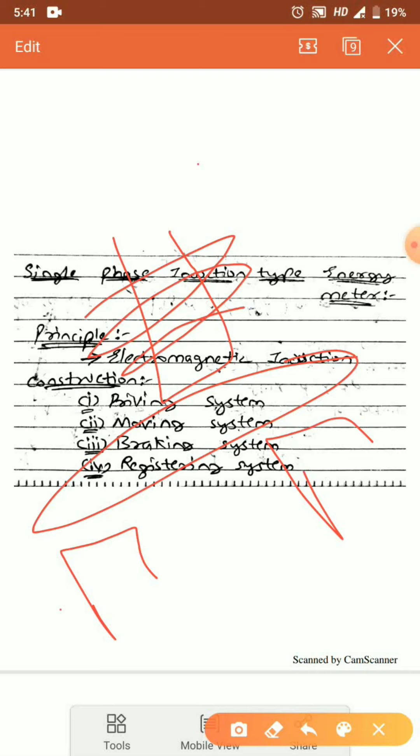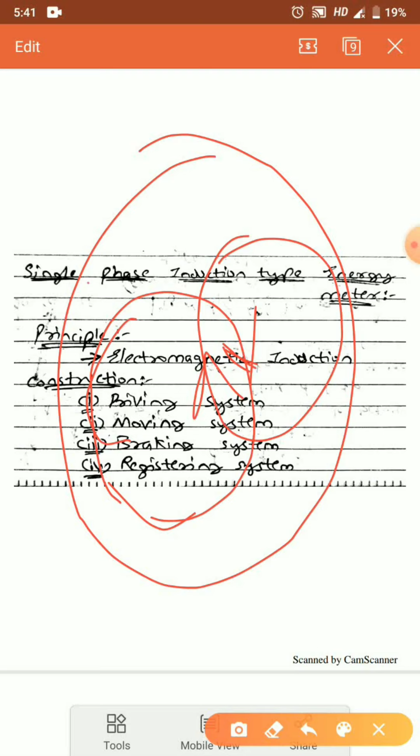Now let us move on to the construction part. The energy meter will have four different systems: a driving system, a moving system, a braking system, and a registering system. Let us go into detail about all these systems.

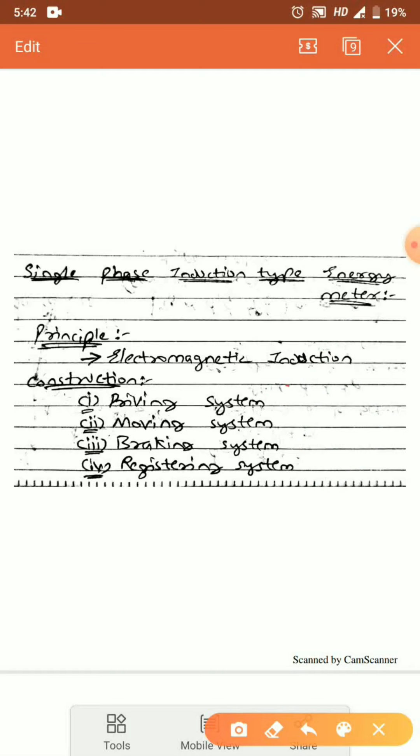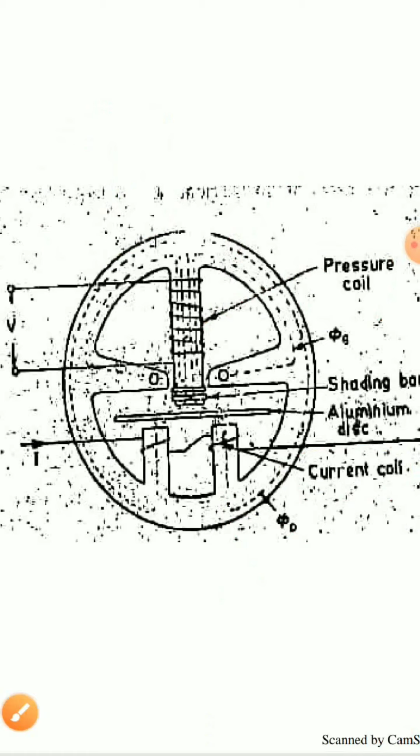The first system is the driving system. In the driving system there are two electromagnets, the core, which we'll call the shunt electromagnet and the series electromagnet. The shunt electromagnet corresponds to the pressure coil, and the series electromagnet corresponds to the current coil. The core of these electromagnets is made of silicon steel lamination.

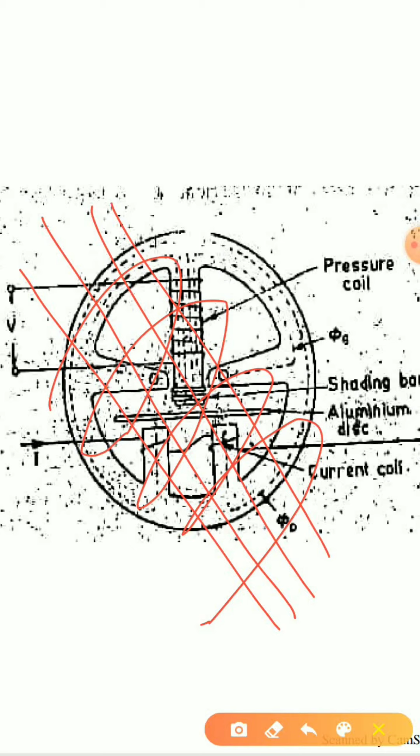Previously we've seen instruments where the winding was air cored, but here the winding is not air cored. In between the winding there is a silicon steel core, that is the electromagnets have a core of silicon steel laminations, as we see in a transformer. One coil of the electromagnet is excited by the load current, whatever current is flowing through the load passes completely through the series electromagnet. The second coil carries a current which is proportional to the supply voltage.

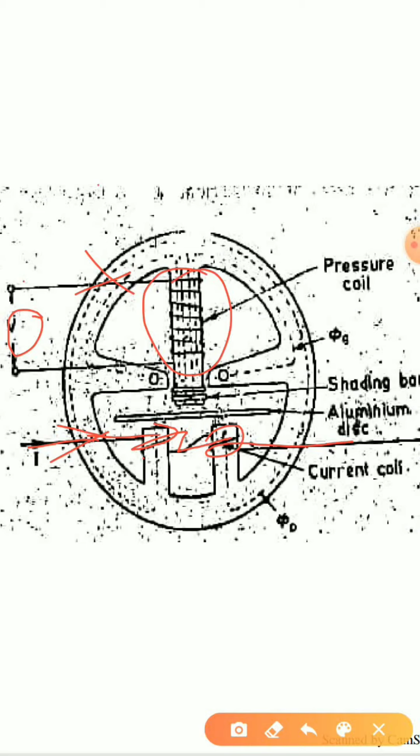If this is my supply voltage, it will measure the voltage across the supply, and whatever current is flowing in this pressure coil or shunt electromagnet will be directly proportional to the value of the supply voltage. These two magnets are called the shunt electromagnet and the series electromagnet. Why series electromagnet? Because it is carrying a current I in series. Why shunt? Because it is measuring the voltage, and whatever current appears across this shunt electromagnet is directly proportional to the voltage value.

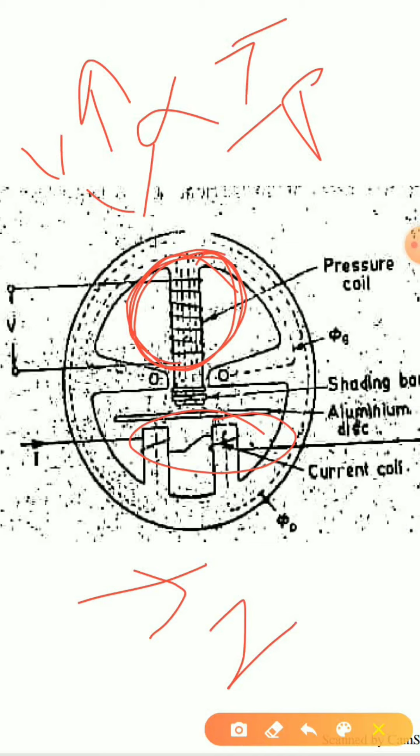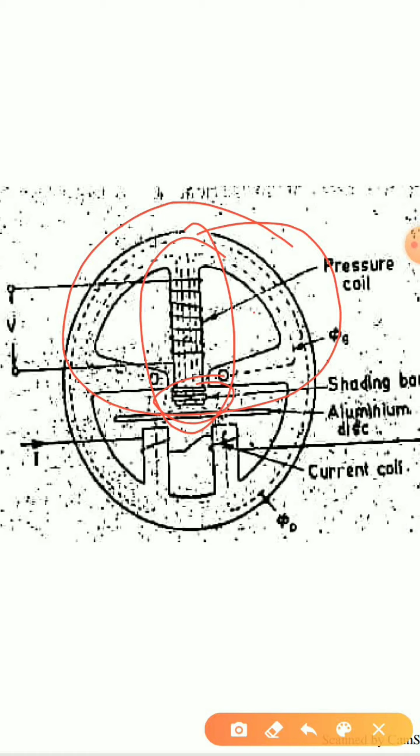One more thing to be noted is that on the shunt electromagnet, I am having some copper shading bands. These copper shading bands are placed on the central limb, this full part. Their position is adjustable, it can either be moved up or moved down. The function of these copper bands is to bring the flux produced by the shunt magnet exactly in quadrature with the applied voltage.

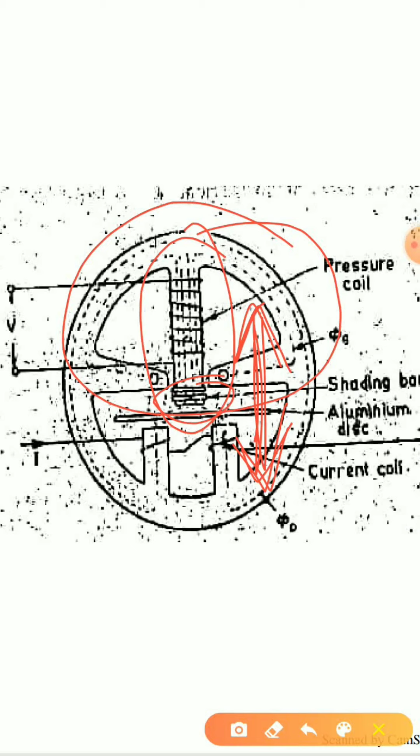Further discussion we will see that the voltage and the current value, that is the current across the shunt coil, its value should be exactly 90 degrees for getting proper operation, that is to get the very accurate operation of an energy meter.

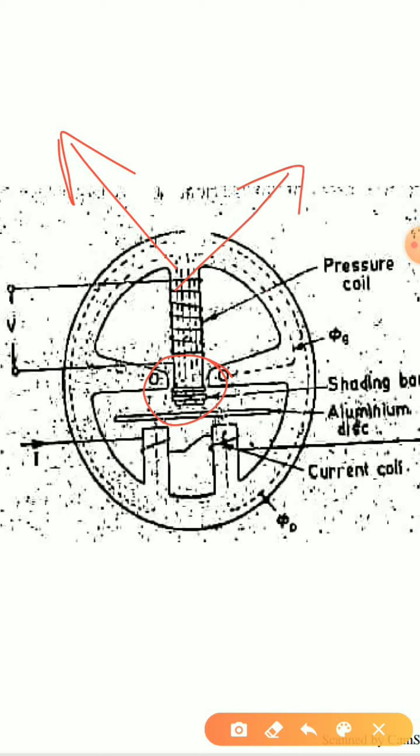Now this copper shading band will help ensure that the phase difference between the voltage and the current in the pressure coil is approximately in quadrature, or it is nearer to 90 degrees.

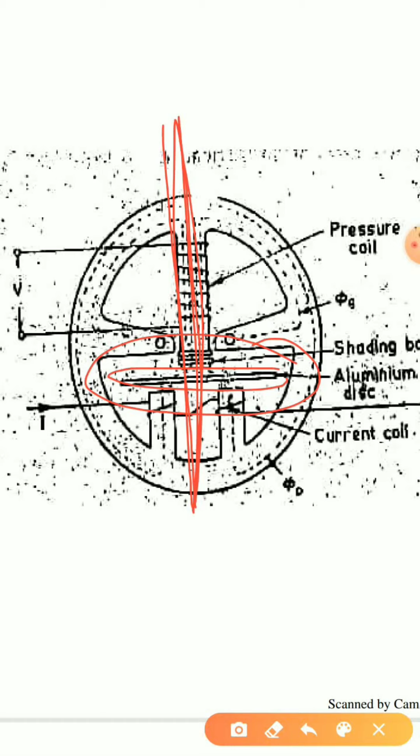The second system that we are having is the moving system. In the moving system we can see that it is nothing but the aluminium disc. This aluminium disc is mounted on a light alloy shaft, that shaft is passing through the center of this meter, and through the center this disc is attached, and this disc is positioned in the air gap between the series and the shunt magnet.

So we can clearly see that the series magnet and the shunt magnet both are not touching the aluminium disc. In between there is a small gap, they are not directly touching. As we have seen, it is working on the principle of electromagnetic induction, therefore there is no need of these magnets, that is shunt magnet, series magnet and aluminium disc, to touch.

Now here we can see that the rotor, that means the aluminium disc, runs on a steel pivot, and this pivot is supported by jewel bearings. Jewel bearings means, as we have seen, two bearings are kept on both the ends, and to both these ends a shaft is there, and on this shaft this aluminium disc is attached.

Now here we can see that this shaft, or this pivot, will have some gears here, and this gear will be attached to some counting mechanism. So we will be moving on, we will be discussing about this part later.

Now moving further, as I have said, a shaft is there, on the shaft my aluminium disc is connected. Now here one thing to be noted is that to the ends of this shaft small magnets are attached, and what this magnet will do is

this magnet will try to attract to the upper bearing, that is the upper magnet will try to attract to the upper bearing, and the lower bearing connected to the magnet connected to the lower end of the shaft, it will try to attract to the lower bearing. In this manner we can see that this is producing a force to the upward direction. The second magnet, the lower magnet, is producing a force to the downward direction. So in this manner we can see here that it is suspended, somewhat suspended, that it doesn't have direct contact with the bearing, it is somehow staying suspended.

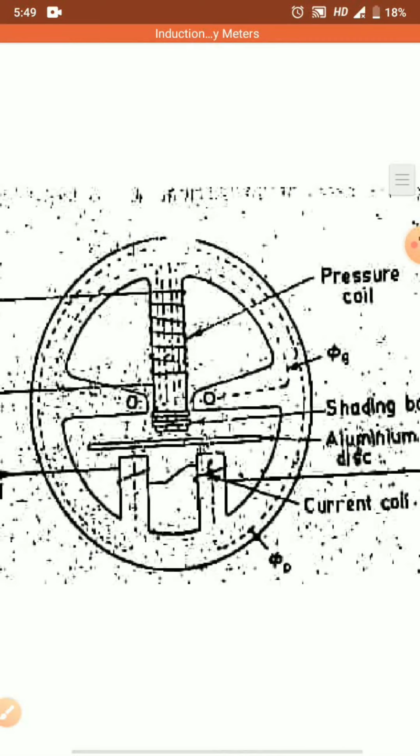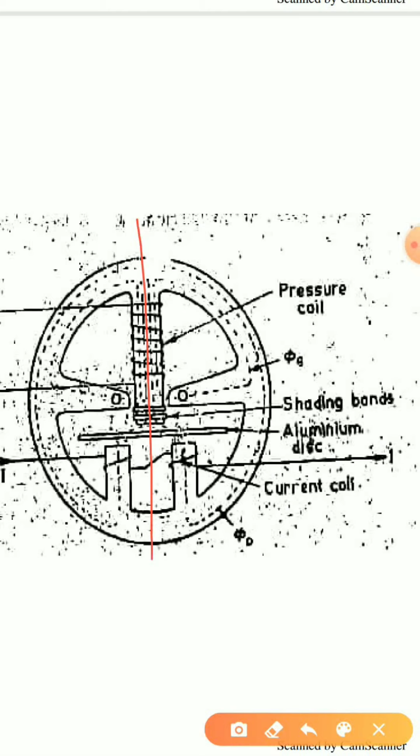The fourth system I am having is the registering mechanism or counting mechanism. As we were discussing earlier, to the shaft some gear pinion arrangement is made. This gear pinion arrangement will be connected to a counting mechanism. In the counting mechanism, as we see in the odometers of our vehicles, some numbers are mentioned and some gear arrangement is there. When this gear is connected, it will move the registering mechanisms, and because of this, the readings can be continuously monitored.

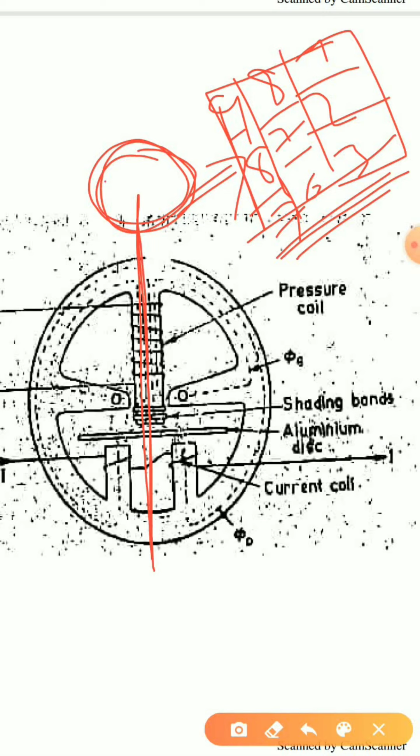A number will be recorded, which is proportional to how much rotation is being made. Just like in our vehicles, the speedometer has a speed pointer, and next to that, how many kilometers we have traveled, which is also rotating because of some gearing mechanism. In a similar manner, some gearing mechanism can be used here, and we can register or count how much energy is utilized during the operation.

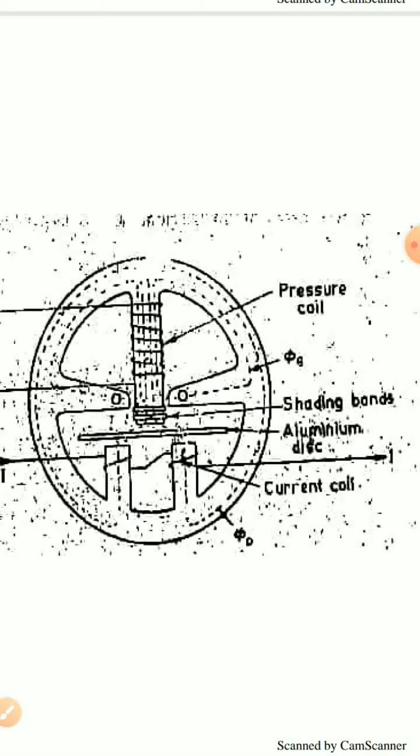Now moving on to the torque equation. Before that, we'll have to look into the phasor diagram. Let us look into the phasor diagram. Let me explain the phasor diagram.

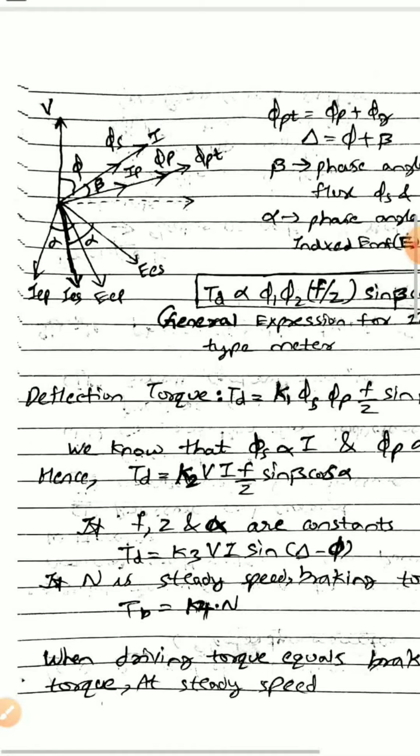Here we can see this is V, the voltage, the supply voltage that I am giving to my energy meter. I am talking about current and voltage. Between the supply voltage and the current, a phase difference phi is there. So it is clear that this is the supply voltage, this is the supply current, and between my supply voltage and my supply current, a phase difference phi exists.

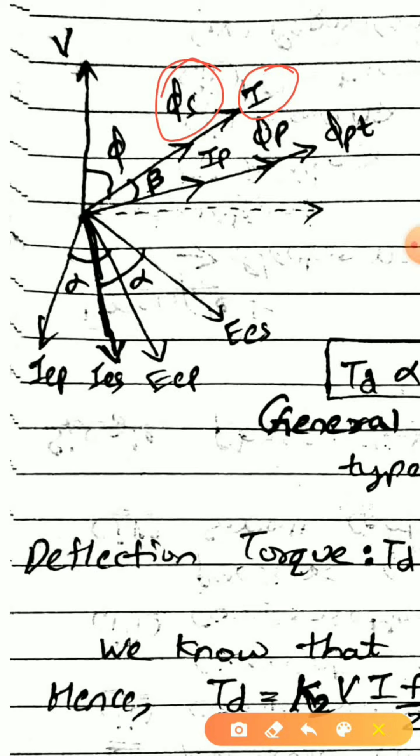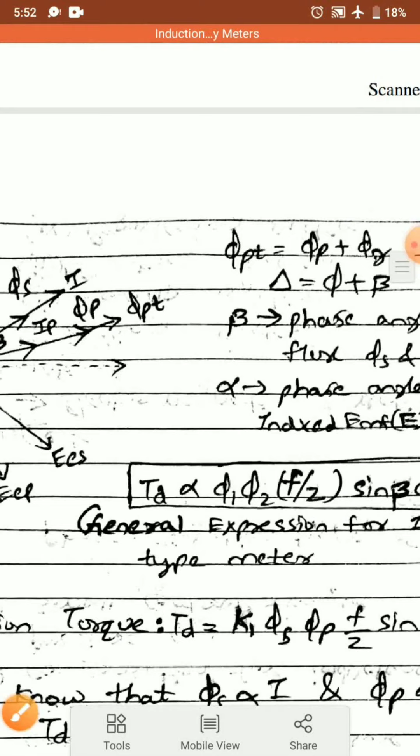Because of this current I, we see that the flux phi s is flowing directly in my series magnet. As I flows through my series magnet, it produces a flux phi s, and because of this flux phi s, an EMF is induced, that is Es. We can see that phi s and Es have a difference of 90 degrees, that is, the flux and induced EMF will have a difference of 90 degrees.

Then through my pressure coil a current Ip is flowing. Because of this current Ip, a flux phi p is generated, and because of this flux phi p, I am getting Ep, an EMF that is exactly 90 degrees out of phase.

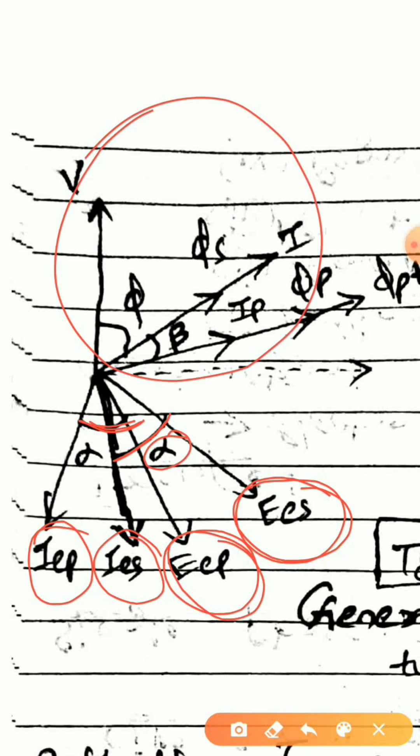Because of this induced EMF of the series magnet, an eddy current is flowing, that is Is, having a phase difference of alpha. In a similar manner, because of the EMF induced by my pressure coil, an eddy current is flowing, also equal to alpha. This eddy current is produced on my aluminium disc. As the material of the aluminium disc is the same, both will have similar phase differences, that is alpha.

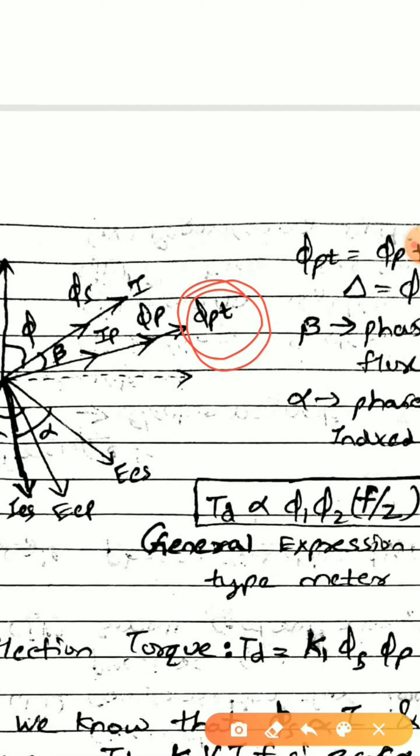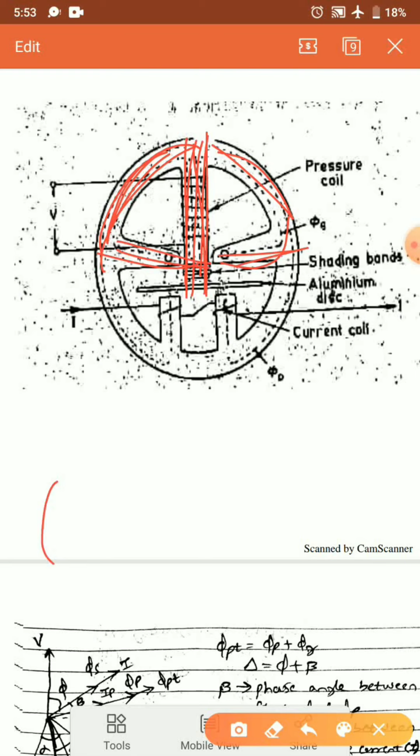From this it is clear that one more thing is phi pt. Why phi pt? That is the flux because of this — flux linkages will be happening, and also some flux will pass through and link in this direction. So phi pt is nothing but the flux linkages because of my pressure coil, and flux linkages because of the air gap.

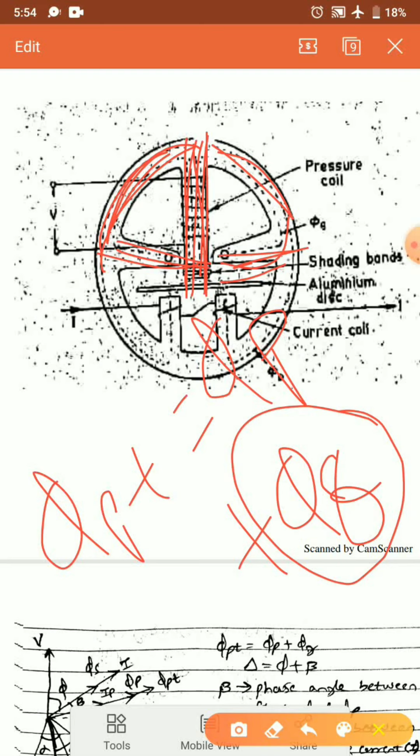The value of this phi g is very small, so it is considerably small and can be neglected. Therefore I am having phi pt, both are in the same direction. Now from this phasor diagram it is quite clear that phi pt is nothing but phi p plus phi g.

One more thing to be noted, as I was telling earlier, is that the value between phi and Ip should be exactly 90 degrees for proper operation. Now for that I am using copper shading bands.

We can see here that this angle phi and beta, when added together, becomes delta. Now beta is nothing but the phase angle between phi s and phi p, that is the flux phi s and phi p will not be produced because of similar quantities, because of the differences in the coil, therefore it is having a phase difference of beta.

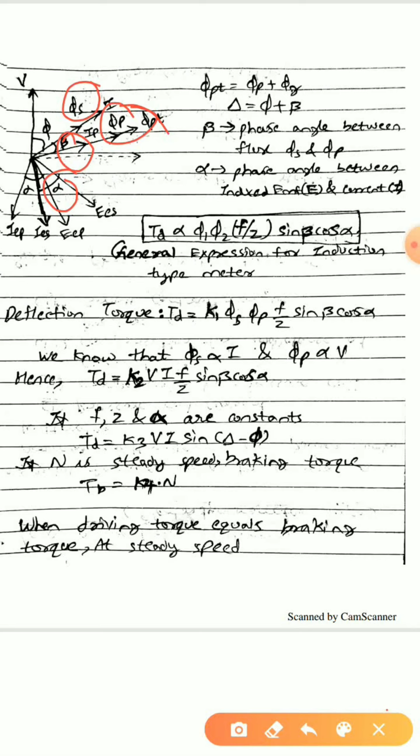Alpha is the phase angle between induced EMF E and the eddy current that is generated because of the induced EMF, that is alpha. Now I hope this phasor diagram is clear.

Now based on this phasor diagram we will be doing some discussions. Before proceeding, one thing to note is the general expression for an induction type meter. It states that whatever deflecting torque is produced in my induction type of instrument, it is because of the two interacting fluxes and F by Z, where Z is nothing but the impedance of the path, and sine beta cos alpha.

So beta is the difference between the flux and alpha is the difference between the eddy EMF and the eddy current. This is the very general expression for an induction type meter. We are not moving into the discussion of how this is derived; we are just taking this expression and using it we will move further.

Now in my condition, the deflection torque, the two fluxes produced are phi p and phi s. Therefore I will just take it to be phi s phi p, and to remove the sign of proportionality, I am adding a constant k1. So I am getting the expression Td is equal to k1 phi s phi p F by Z sine beta cos alpha.

Now we know that phi s is directly proportional to I, and phi p is a quantity directly proportional to V, because Ip is the current because of which phi p is produced, and Ip is the current which is proportional to V. Whatever voltage value is there, proportional to that voltage, current Ip is flowing. Therefore I can take phi p directly proportional to V.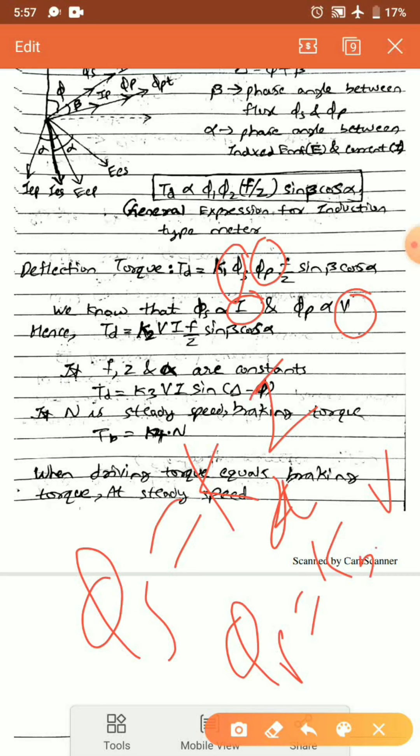Now what I will do is replace phi s and phi p with I and V. When replacing, some constant has to be there, so if I am removing phi s it will become, for example, Ka I, then phi p will become Kb V. In this manner, when adding this, some extra constants are added. Already I am having some constant. Now what I will do is add all these constants together and make it K2.

Now considering the value of frequency, it cannot be changed. The value of impedance of the material I am using also cannot be changed. As the material is the same, the value of alpha will also remain the same, because the impedance is not changing. Because of that, the value of alpha cannot be changed. So here I can note that F, Z and alpha are constants.

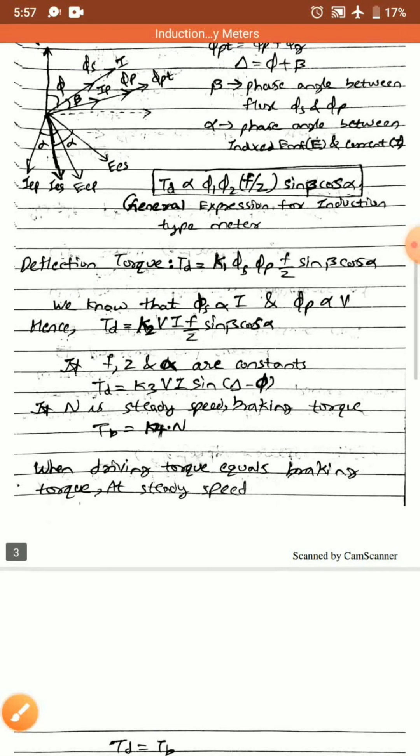Now to this K2, since cos alpha is constant, and F and Z are constant, I will add all these three quantities together and get a new constant K3. Now K3 is because of these three quantities.

Now I can see that my expression becomes Td is equal to K3 V into I sine of delta minus phi. How sine delta minus phi? What I am doing is, beta I can write as delta minus phi.

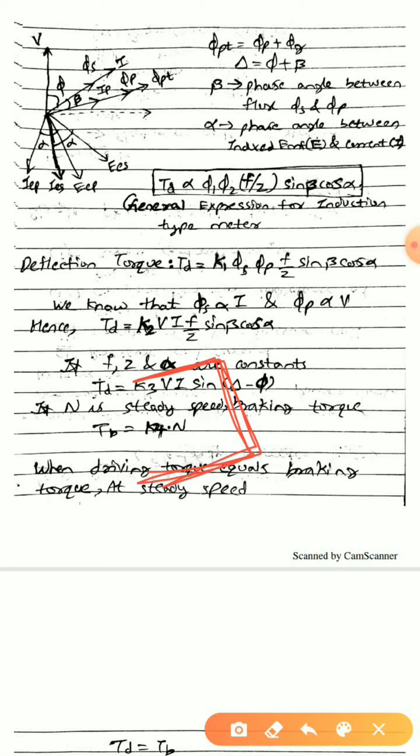From this expression I can write it as del minus phi. Now then I have braking torque. What is braking torque? As I said, because of the permanent magnet attached to one end of the aluminium disc, this will produce a braking torque. This braking torque's value will depend on the speed at which my disc is rotating. Therefore I will take the braking torque to be a constant into n, that is, braking torque is directly proportional to the speed of rotation of my disc. Therefore I get K4 into n.

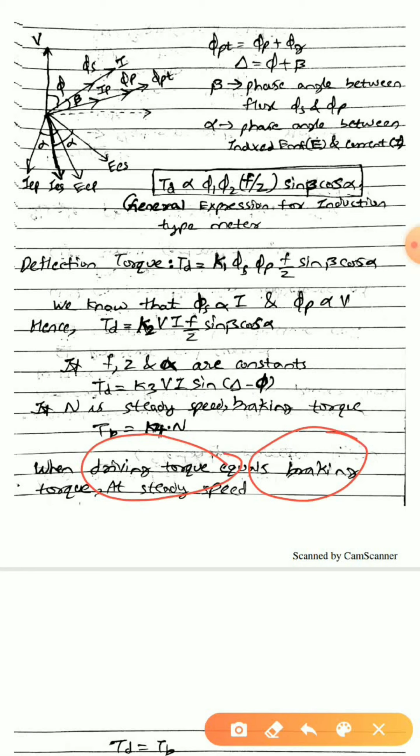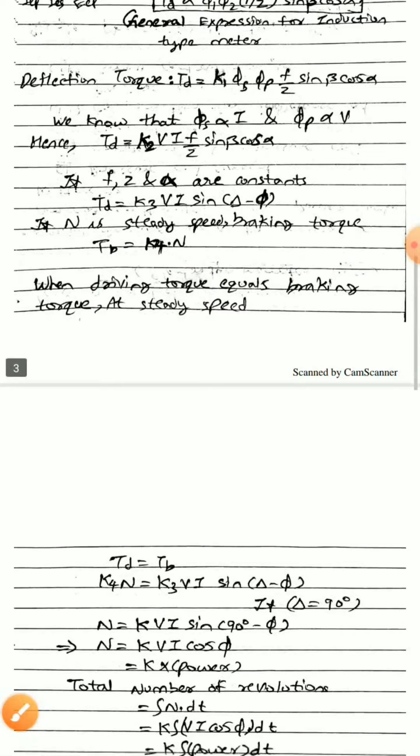Now when my driving torque and braking torque are equal, at that condition I get some steady speed. For example, if this is less and this is more, my disc will not rotate. So when these two are in balanced condition, I get some constant rotation in my aluminium disc. At that condition, I am taking my deflecting torque and braking torque to be equal, and substituting the values here. I am taking the value of delta to be equal to 90 degrees, because when it is closer to 90 degrees, I get proper operation in my induction type energy meter.

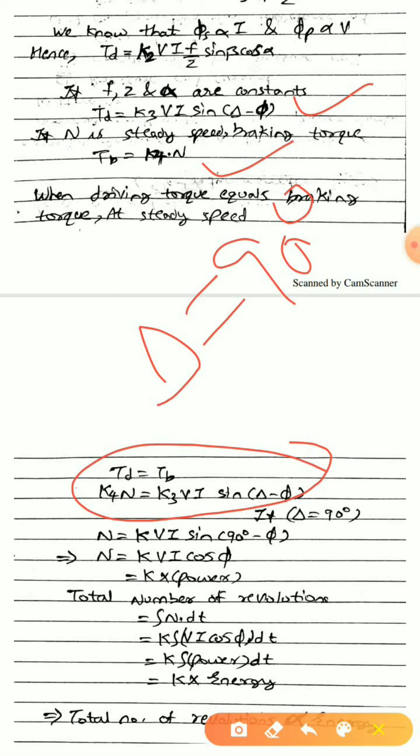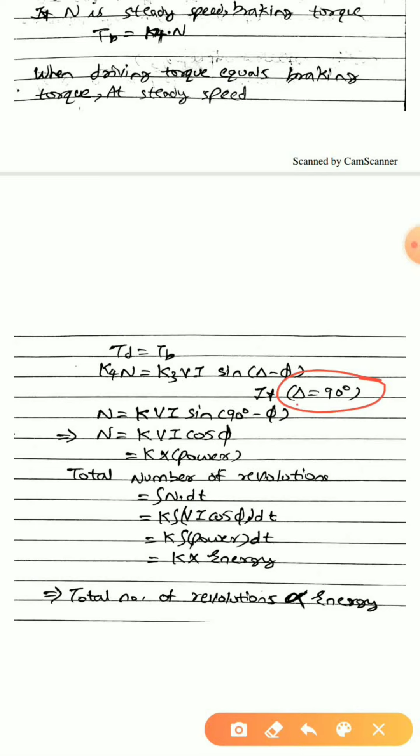So I am taking the value of del to be 90 degrees. Practically this will not be exactly 90 degrees, it will be approximately equal to 90 degrees. Using arrangements like copper shading bands, we can achieve it and make it somewhat near 90 degrees. Now the expression I get is n k V i sine of 90 degrees minus phi. Sine of 90 degrees minus phi I can take as cos phi. Here I can see that V i cos phi is nothing but my power, so the speed of rotation is equal to K into power.

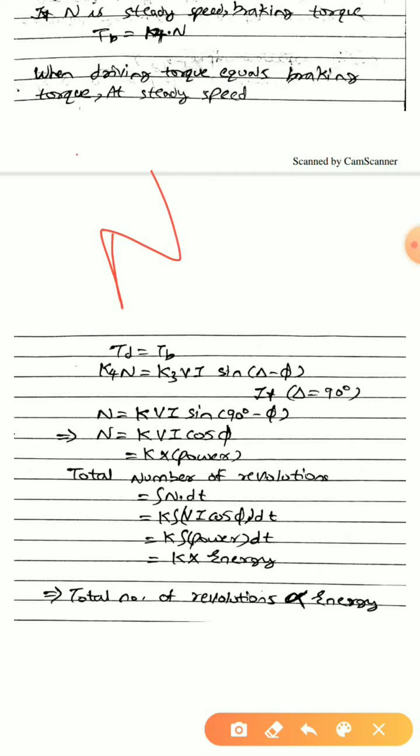Now if I have to consider the full rotation, for example how many rotations are happening, to calculate the full rotations I have to integrate this over the time period. Integrating it over the time period, I get k integral of power into dt. Now power into dt is nothing but energy. So the total number of revolutions is directly proportional to the energy. From this discussion it is quite clear that an induction type energy meter can be used such that however many revolutions it makes, those revolutions will directly show how much energy is consumed.

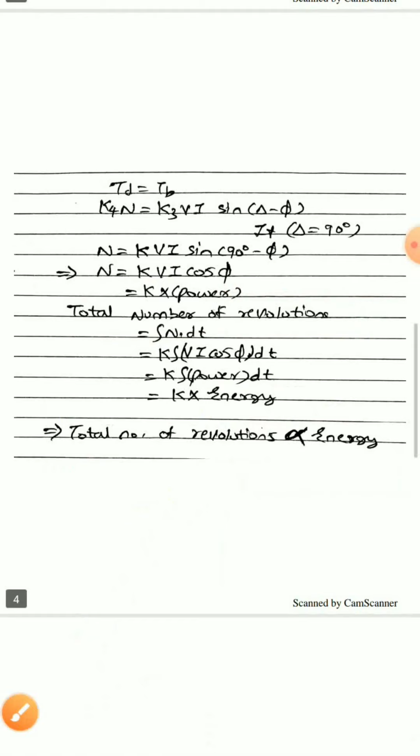Now when I am talking about my single phase induction type energy meter, we can see that some problems occur. To address these problems, we will be using some techniques. There are many different types of errors. We will just be discussing some very common errors for which we will be using physical compensation devices.

The first type of error is that we have to adjust the angle, that is, we have to do lag adjustment. For performing lag adjustment, two techniques are used: one, we will be using adjustable resistors, and the second, we will be adjusting the position of the shading bands. Now let us look into how this is achieved.

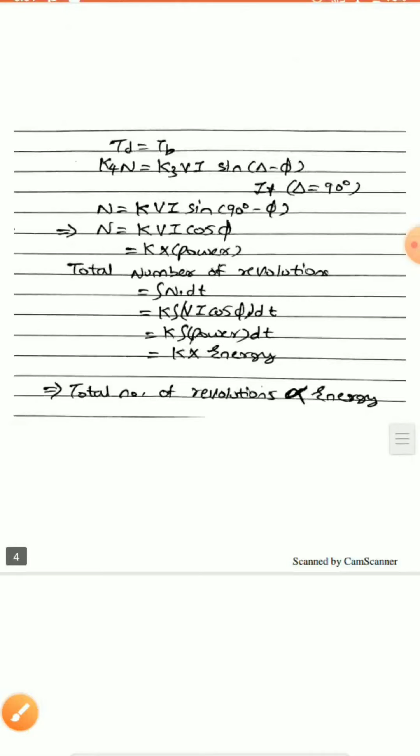When I am using adjustable resistance, this method shown here is such that a shading band is connected to the central limb of my induction type energy meter. Let me show it in the construction diagram. In this construction diagram we can see clearly this is the central limb. To the central limb some shading bands are arranged and attached, and to this coil arm, what I am doing is adding an adjustable resistance.

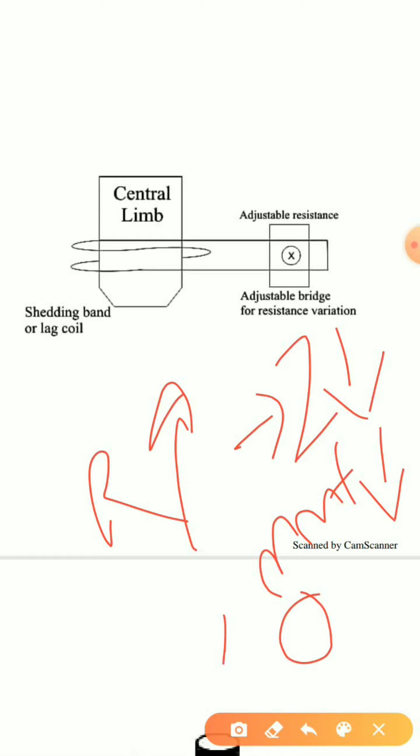I am going to add an adjustable resistance. When I add this, an increase in the resistance value will decrease the current. That is, if resistance is increased, the current decreases, and as current decreases, the MMF in the lag coil will also decrease. Second, if the MMF value is decreased, the lag angle theta will also get reduced. So by adjusting the resistance, I can easily adjust the lag angle. The lag angle can be increased by decreasing the resistance of the lag coil circuit.

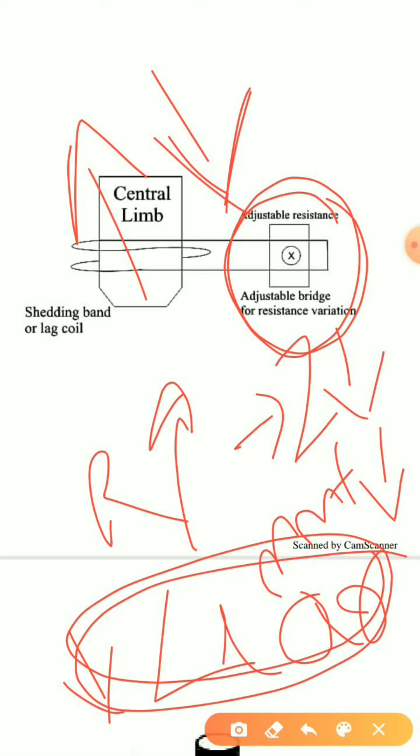I can adjust it to some extent. This adjustable resistance is directly connected to the coil, that is, the pressure coil of my shunt electromagnet. The second technique we can use is the shading bands.

The shading bands I talked about are directly placed on the central limb of the shunt magnet. These copper shading bands can be adjusted, that is, moved up or down depending on our requirement.

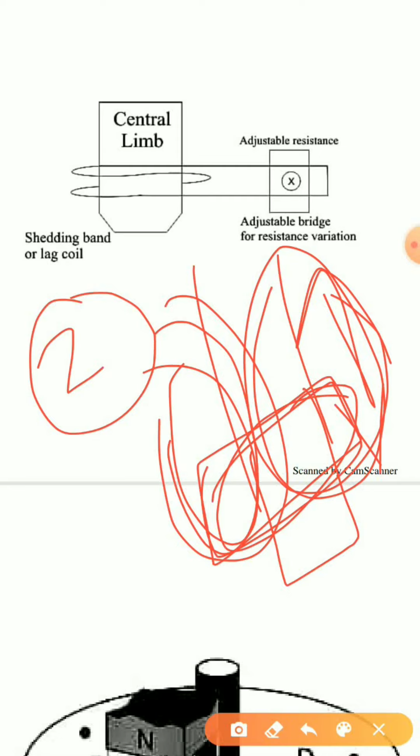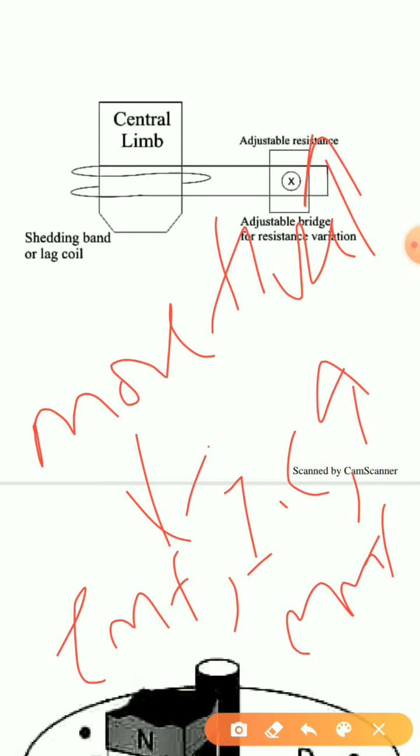When we move the shading bands up the limb, they will embrace more flux, meaning more flux will flow across these shading bands. As more flux flows through the shading band, it results in more induced EMF, current, and MMF. Corresponding to this, the value of induced EMF, induced current, and MMF will increase considerably, and the value of lag angle will also keep increasing.

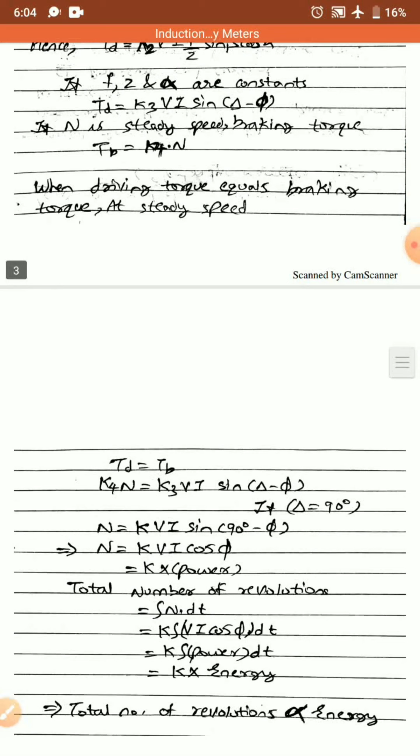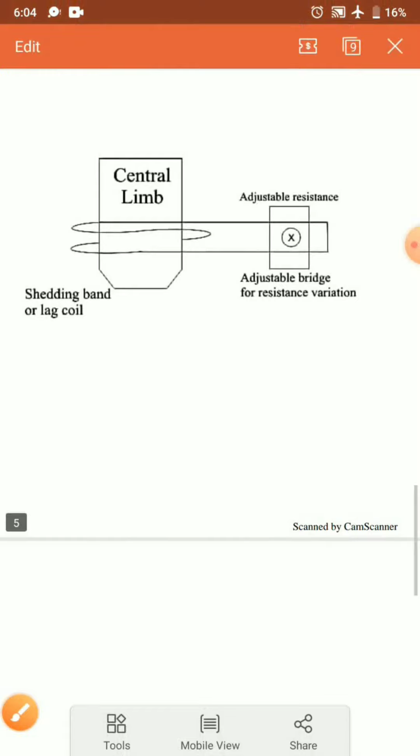Conversely, when I move the shading band down, the MMF decreases and the lag angle is reduced. In this manner, I can adjust the lag angle of the instrument, since the value of delta should be equal to 90 degrees for proper working of an energy meter. This angle can be adjusted using adjustable resistance and shading bands connected to the central limb of my induction type energy meter.

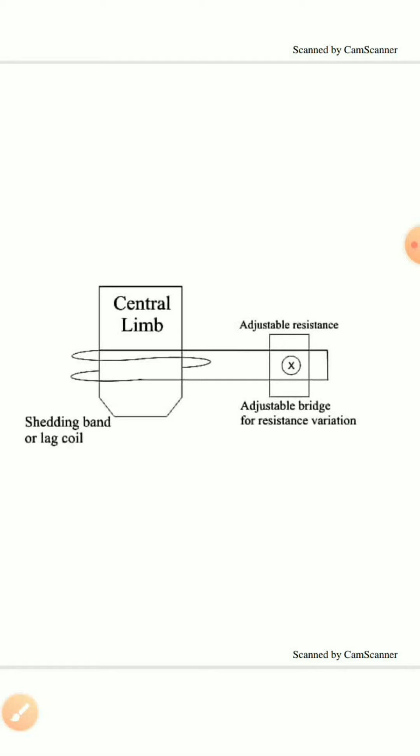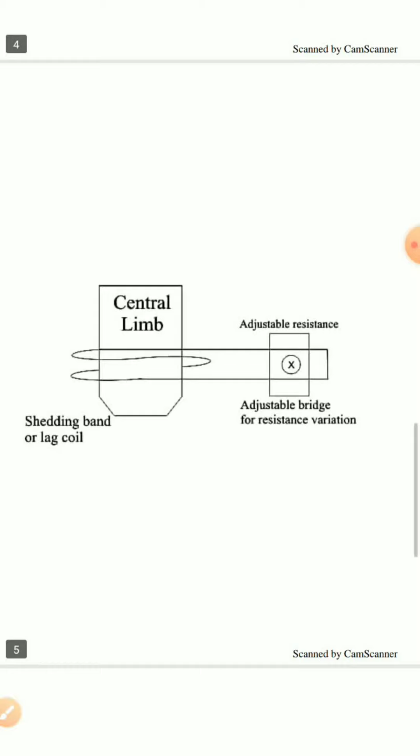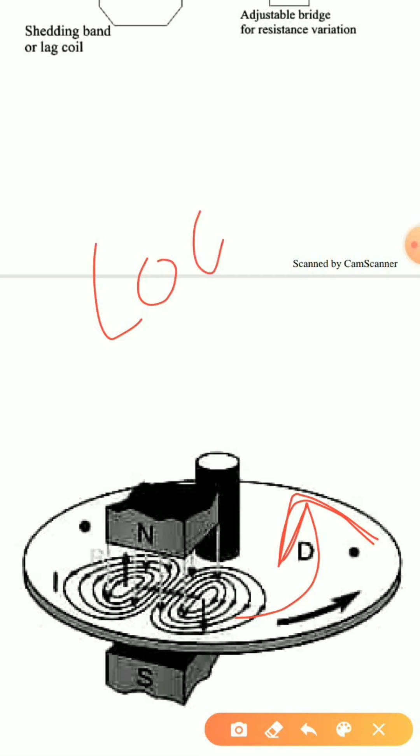The second problem I am having is creeping. Creeping is a slow but continuous rotation obtained even when there is no current flowing through the current coil. That is, if I give supply only to my pressure coil, it will produce induced EMF, causing my aluminum disc to start rotating. So when no current is consumed, that is, the load is consuming no current, the aluminum disc is still rotating, and because of this, false readings of energy consumed will occur.

To avoid that, what I can do is drill two holes, that is, two diametrically opposite holes at two diametrically opposite ends of the aluminum disc.

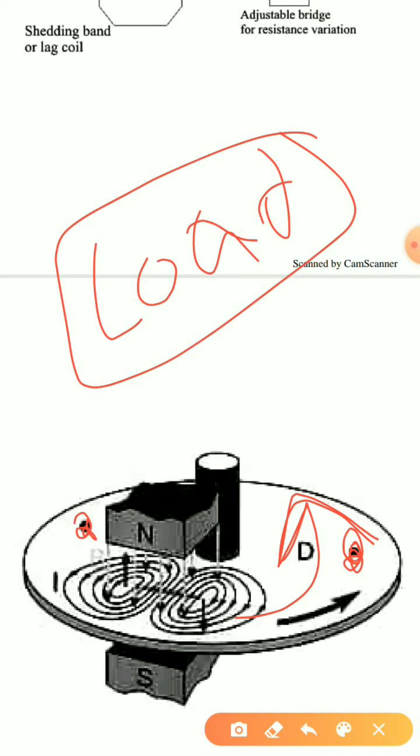When this disc is rotating and the hole comes below the central limb, no flux interaction will be there, that is, flux will flow directly from the north pole to the south pole of the magnet, and because of this, the rotation of my aluminum disc will be stopped. Here there will be rotation, but only half rotation, because two holes are there, rotating either in this direction or the opposite direction.

If I see, only half rotations are possible. Now to avoid creep, what I can do is I can add two diametrically opposite holes.

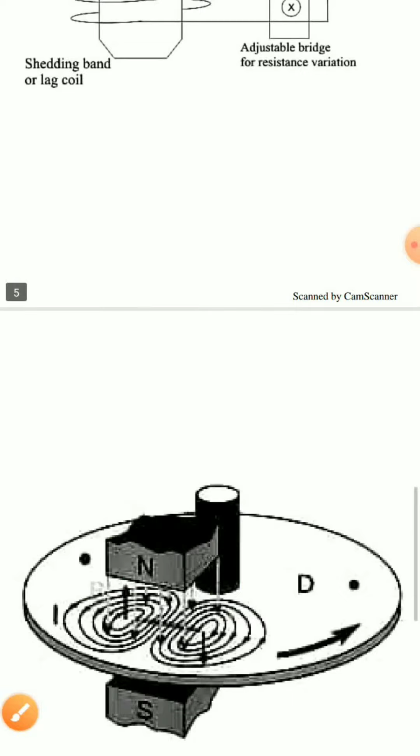Now talking about polyphase energy meters, we can see that the energy in a polyphase circuit can be measured by a group of single phase energy meters connected according to Blondel's theorem. We have discussed Blondel's theorem earlier when discussing the measurement of three-phase power. Now according to the principles of Blondel's theorem, we can measure the energy of a polyphase system.

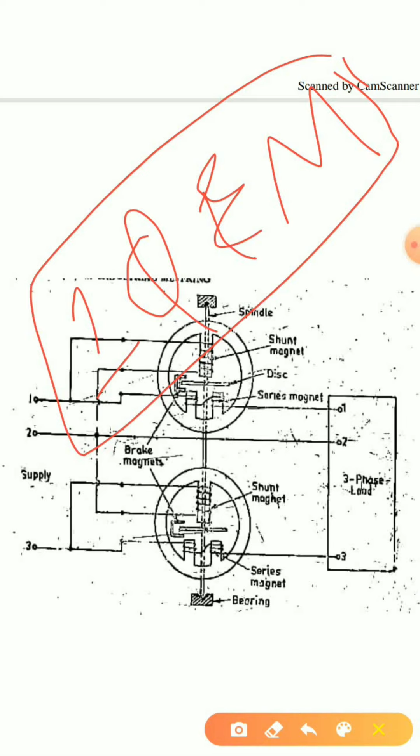Now when discussing polyphase wattmeters, we could mount the elements on the same spindle which will drive the registering mechanism. The same spindle will be used, and 2 or 3 coils will be attached to it, and based on this I can get 3-phase wattmeters.

Or what I can do is use a multi-disc type arrangement. In this arrangement, 2 or 3 different discs will rotate, and their actions will be combined together for the wattmeters. The same principle can be used for induction type energy meters as well.

Now let us discuss the 2-element energy meter. The diagram shown here is of a 2-element energy meter. We can see that a 2-element energy meter uses a 3-phase 3-wire system, and the meter is provided with 2 discs, one for each element.

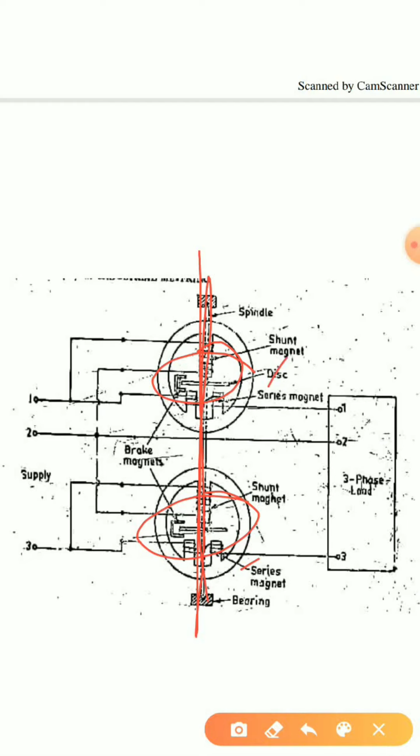It is necessary that the driving torques of the 2 elements be equal for equal amounts of power passing through each, because they are connected to a common shaft. If one element is moving fast and one is moving slow, that should not happen, it should be avoided. That is, for equal amount of power passing, both should show equal amount of rotation.

The pressure coils are connected in parallel and the current coils are connected in series, in such a manner that the torque produced by the 2 elements will oppose each other. Normal compensating devices are attached to each element, and a magnetic shunt is placed in either one or both positions so that the 2 torques are made exactly equal and opposite, achieving balance between the elements.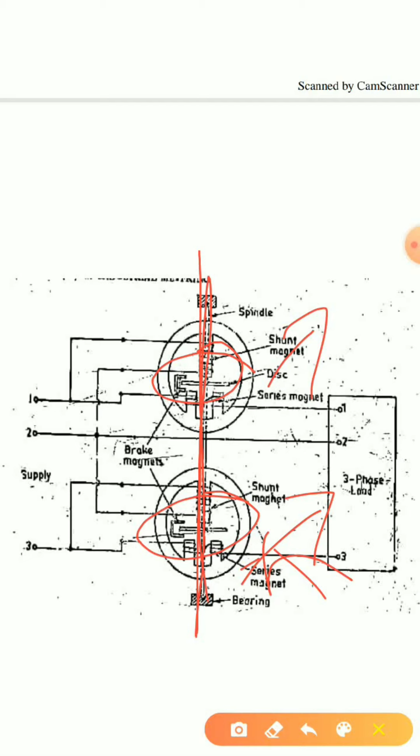The 2 elements are equally similar. We can consider this to be a single phase energy meter, and this to be another single phase energy meter. The only difference is that both aluminum discs are mounted on a single spindle or shaft. The rotating elements are mounted on a single shaft.

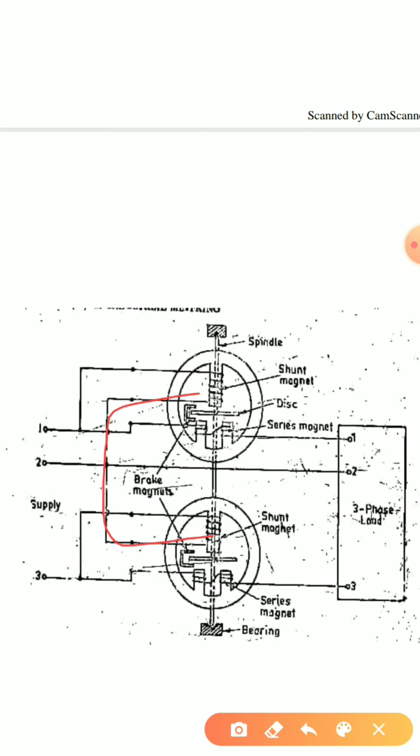Looking here, the phase 3 current coil is in series, and the phase 1 current coil is in series. The shunt coil is connected between 1 and 2, and the second shunt coil is connected between 3 and 2. As we have seen for the 2 wattmeter method, connections for 2-element energy meters are made in a similar manner.

As we have clearly seen, if I use 2 single phase wattmeters, I can easily measure 3 phase power. In a similar manner, if I connect 2 single phase energy meters together in this way, I can easily measure the power of a 3 phase system.

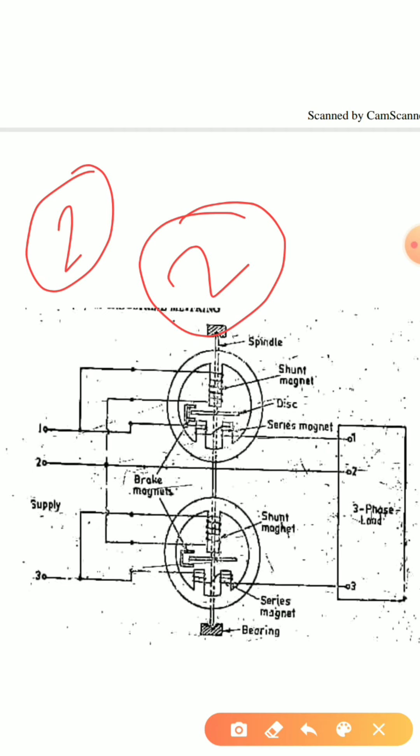Here also we can see that some brake magnets are used, and all the other arrangements are similar, but the only difference is that here there will be no two registering mechanisms. I will have two moving systems, two braking systems, and two driving systems, but only one registering system, connected to the single spindle or shaft.